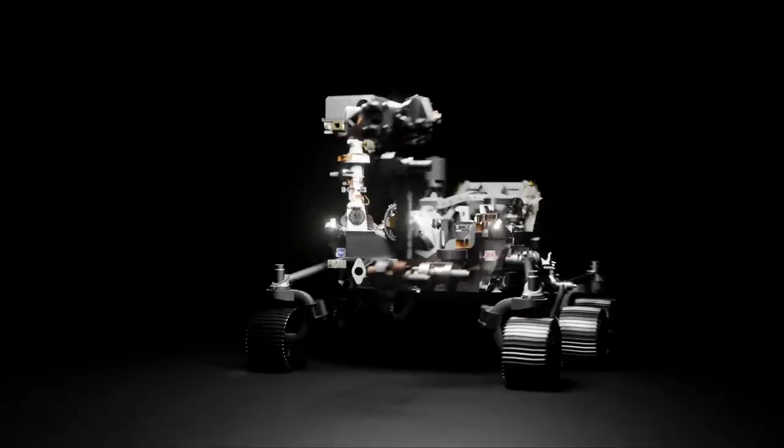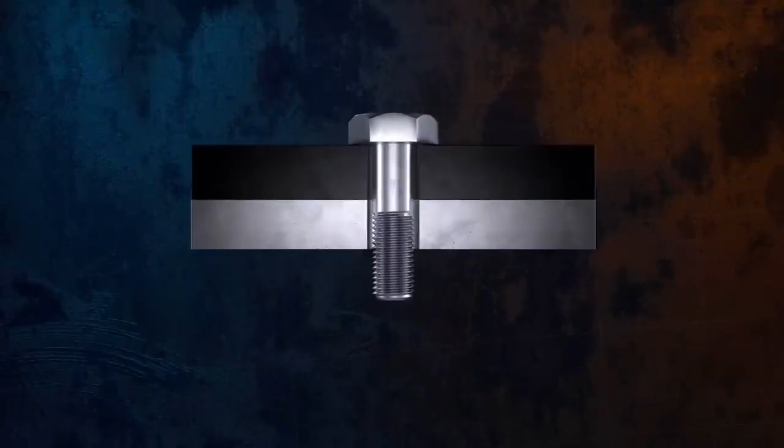But there's more to them than you might think, and it all starts with the assembly process. Here's a simple bolted joint, where the fastener, in this case a single bolt, passes through holes in two plates and is secured with a nut to complete the assembly.

Let's look closely at what happens when the nut is tightened. As it's turned, the threads on the bolt and the nut engage, and rotation of the nut pulls the bolt threads down, which causes the bolt to stretch. This stretching creates a tensile force in the bolt, pulling the two joined members into contact with one another and compressing them.

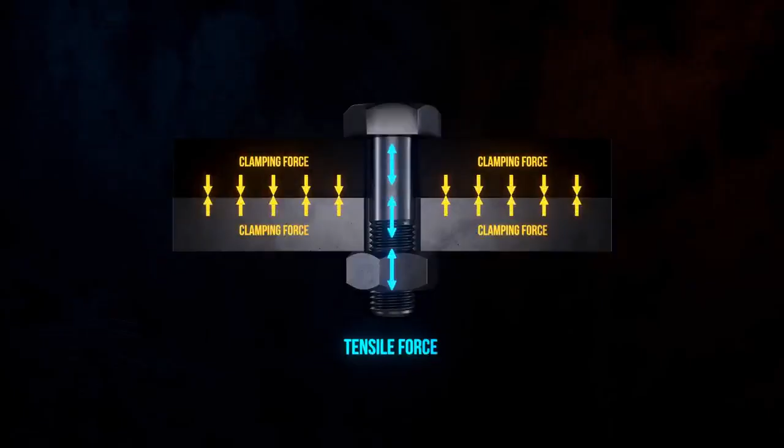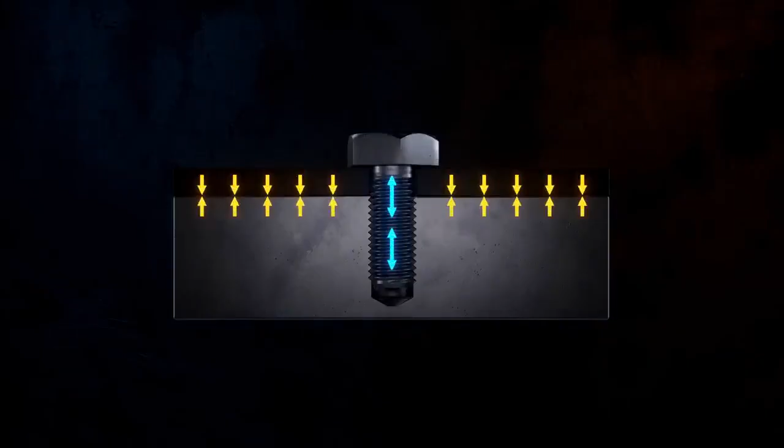The same thing happens for screws in threaded holes, except the tensile force is generated by tightening the screw instead of a nut. This tensile force in the fastener is called preload. It's intentionally applied to the bolt or screw before any external loads that act on the joint.

Preload is surprisingly powerful. It makes the joint stronger, more resistant to fatigue damage, and much less likely to fail. The exact way the preload force works to improve the load-carrying capacity of a joint depends on how the joint is loaded. Joints are usually grouped into two categories. If the load acts along the axis of the bolt, it's a tension joint. And if it acts perpendicular to the axis, it's a shear joint.

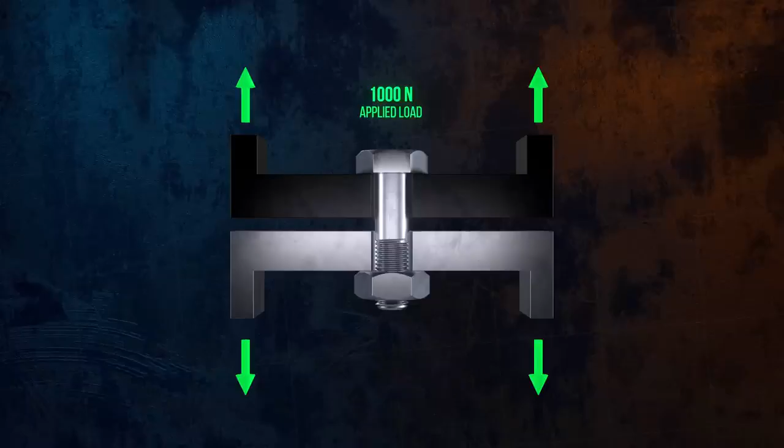Let's look at tension joints first. In these joints, the applied load is trying to pull the two joined components apart. Without any preload in the bolt, the joint begins to separate almost immediately as the load is applied, because the load stretches the bolt. But things happen a bit differently if the bolt is preloaded, because of the clamping force holding the two joined members together.

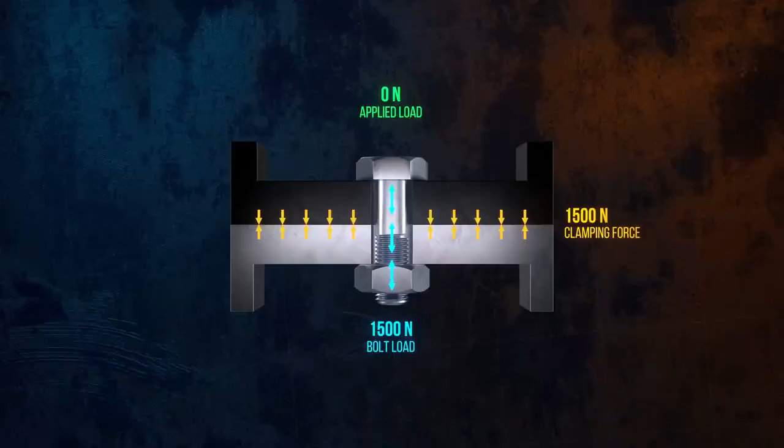As the load is applied, only a small portion of it is taken by the bolt. Most of it is taken by a reduction in the clamping force between the two joined members. The exact way the applied load is distributed between the bolt and the clamped components depends on the relative stiffnesses of the parts. The joined members are usually much stiffer than the bolt, which is why so much more of the applied load is used up by reducing the clamping force.

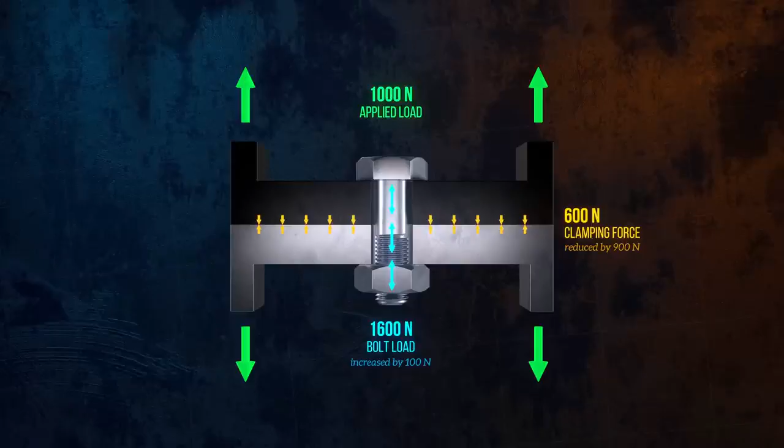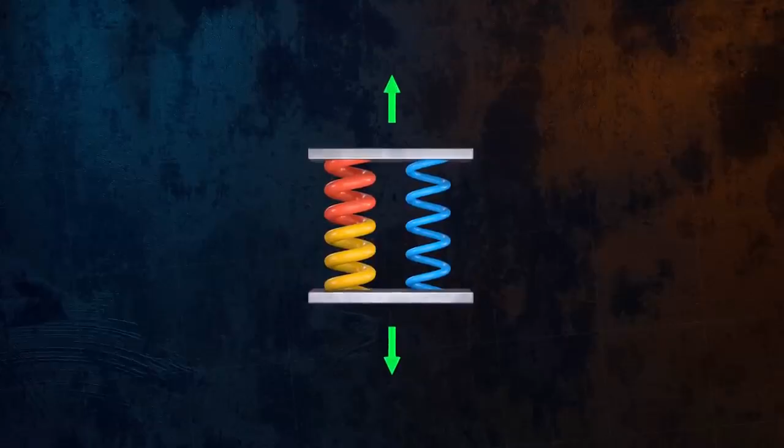You can think of the joint as an assembly of springs. When the preload is applied, the spring representing the bolt is stretched and held in place, and the springs representing the joined members are slightly compressed. When an external load is applied, the springs representing the joined members take most of the load, because they're much stiffer than the bolt spring.

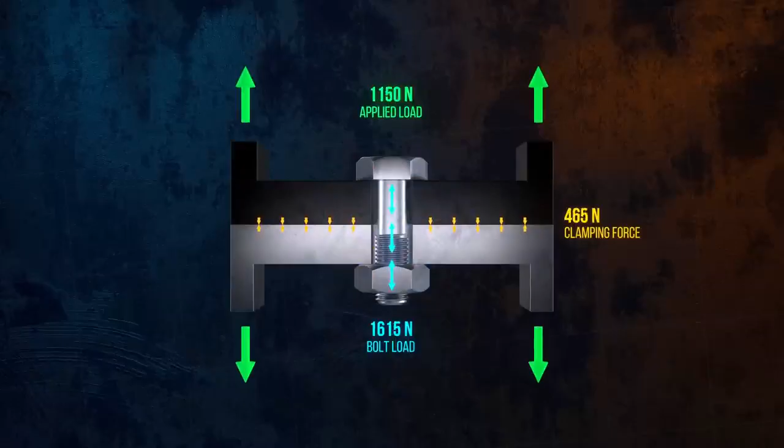If the applied load increases enough that the clamping force is overcome, the two members move apart from each other. At this point, any additional load that's applied to the joint will be taken only by the bolt, right up until failure.

Here, the joint has failed by fracture of the bolt, but tension joints can also fail by failure of the joined members, or by stripping of the bolt or nut threads. For design purposes though, failure of a tension joint is usually considered to occur once the clamping force has been overcome, because it's likely to fail soon after as any additional loading is applied only to the bolt.

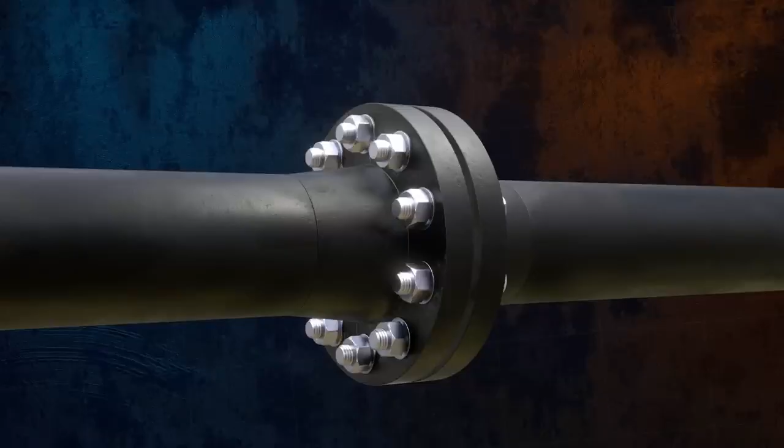In applications where the clamping force is used to maintain a seal, failure might be considered to occur once the clamping force drops to below a critical value, beyond which the seal is no longer considered to be reliable.

As well as helping to keep clamped parts in contact, preload is hugely beneficial for joints that experience cyclic loading and are at risk of fatigue failure, because fatigue life is a function of the applied stress range, not the magnitude of the applied stress. Since the bolt in a preloaded joint only carries a small proportion of the overall load, it will have a much longer fatigue life than a bolt without preload.

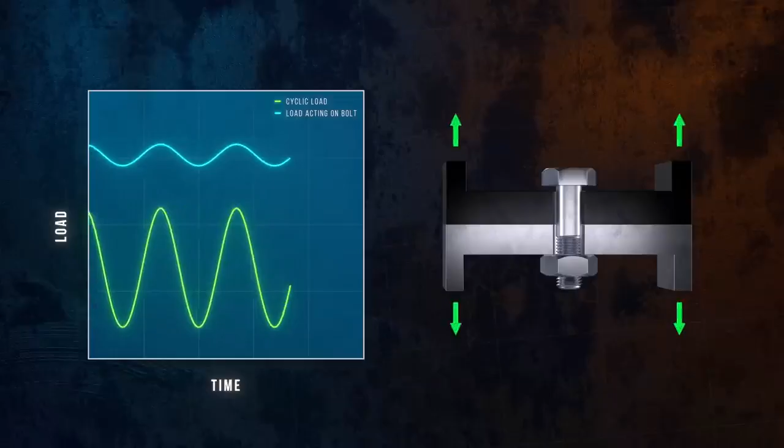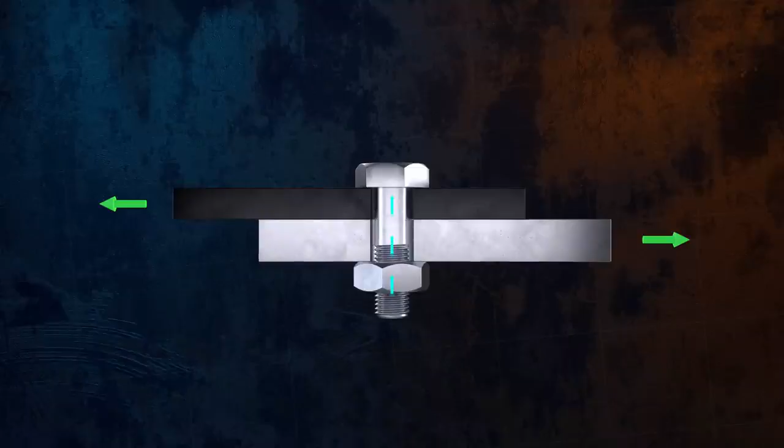Let's look at shear joints next, which are very common in structural steel assemblies. In shear joints, the load acts perpendicular to the bolt axis. In this scenario, applying preload to the bolt is useful because the resulting clamping force generates a frictional force that resists any sliding between the two joined members.

The magnitude of the total frictional force can be calculated in exactly the same way you would calculate the frictional force acting on a block sliding on a surface. It's equal to the force normal to the surface, multiplied by a coefficient of friction.

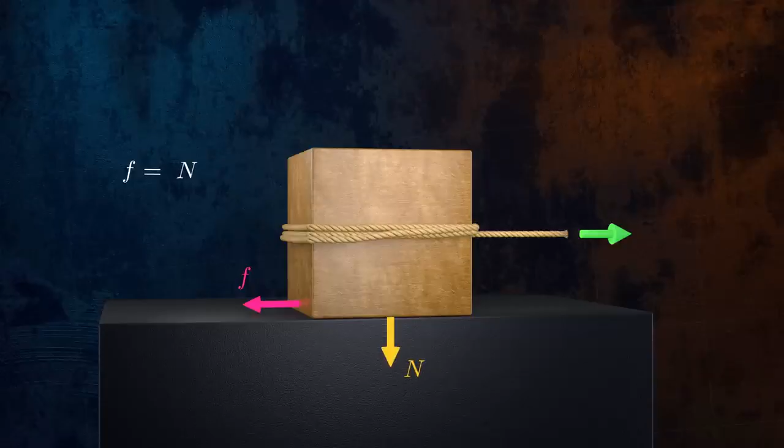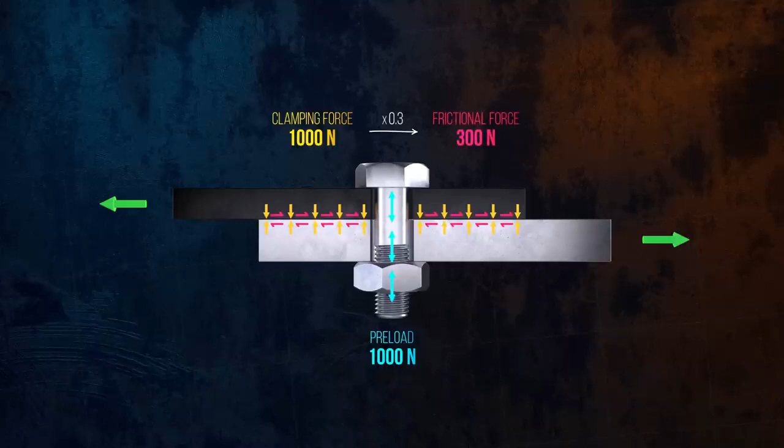In the case of a shear joint, the force normal to the surface is the clamping force, which is equal to the preload. The coefficient of friction depends on the specific materials being clamped, but in this case we'll assume a value of 0.3.

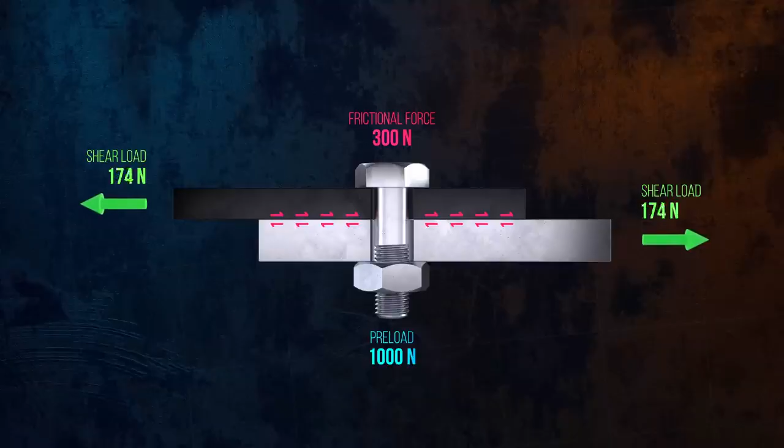The frictional force is useful because so long as it's larger than the applied shear force, the bolt doesn't actually see any shear loads. The full shear load is resisted by the frictional force, and the bolt is only loaded by the tensile preload force. Joints designed to use this frictional force to carry shear loads are called slip-resistant joints.

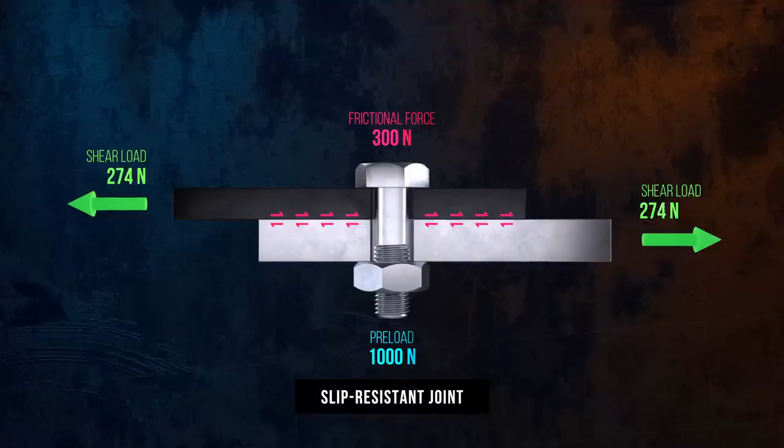If the applied load exceeds the frictional force, the joint will slip, and the joined parts will come into direct contact with the bolt, which is called bearing contact. In some applications, the joint is considered to have failed if it slips, but in others, slipping is acceptable.

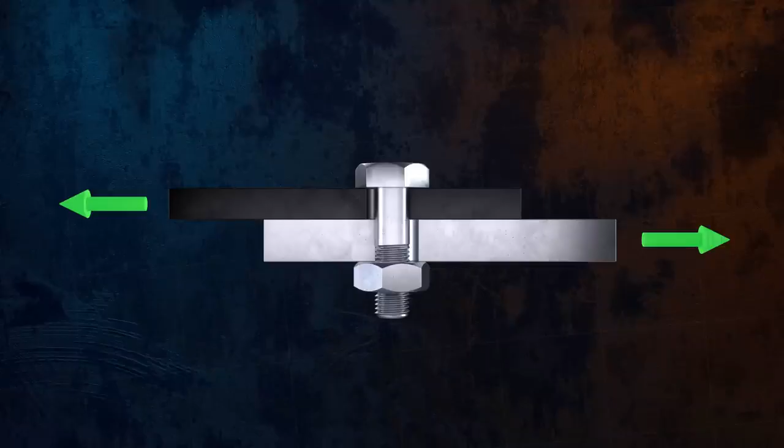A shear joint, where the load is transmitted directly from the joined members to the bolt by bearing contact, either because the applied force has exceeded the frictional force, or because the joint has intentionally been designed with little or no preload, is called a bearing joint.

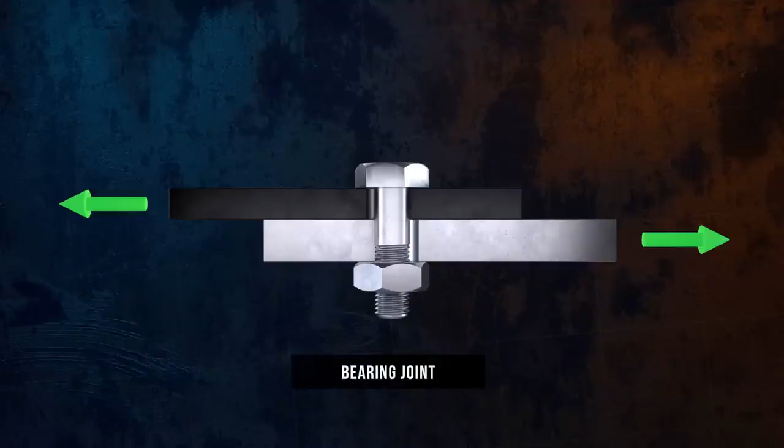Bearing joints can fail in a few different ways. They can fail by tensile failure of the clamped material. They can also fail by bearing failure, where the bearing stress at the contact surface causes an elongation of the bolt hole.

Or if the hole is located close to an edge, the joint can fail by tear out, where the material around the hole in the clamped part shears. To reduce the risk of tear out, bolts should be located at least 2 diameters away from an edge.

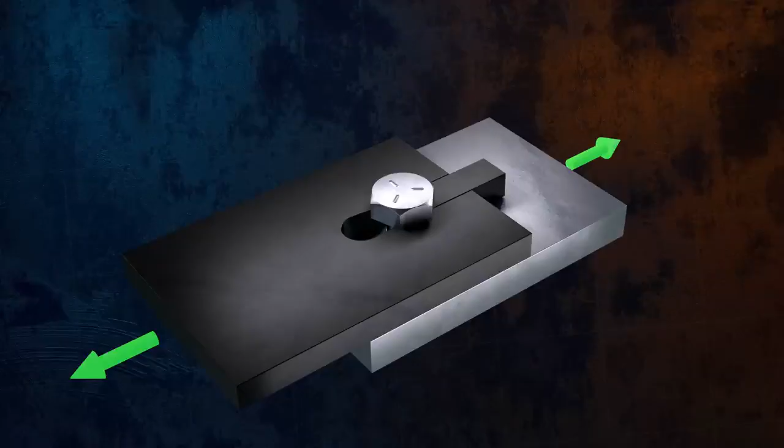And finally, bearing joints can fail due to shear failure of the bolt itself, when the shear stress in the bolt exceeds the shear strength of the material.

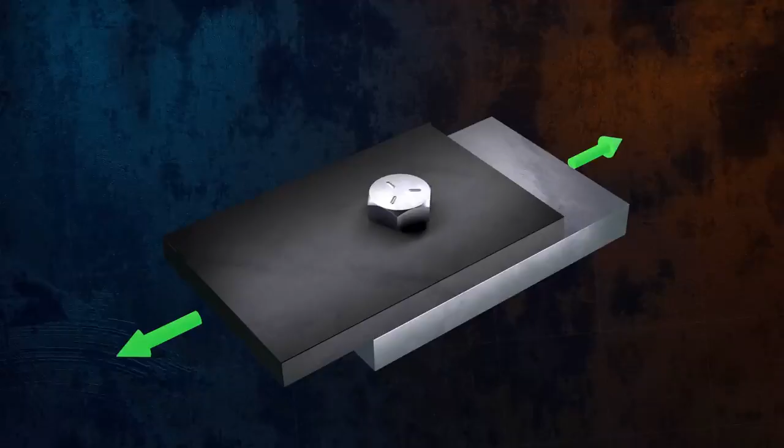For this type of joint, it's best to avoid having the threads of the fastener extend into the shear plane, because the reduced cross-sectional area within the threads will result in a larger shear stress on the bolt, meaning that the bolt will fail at lower loads.

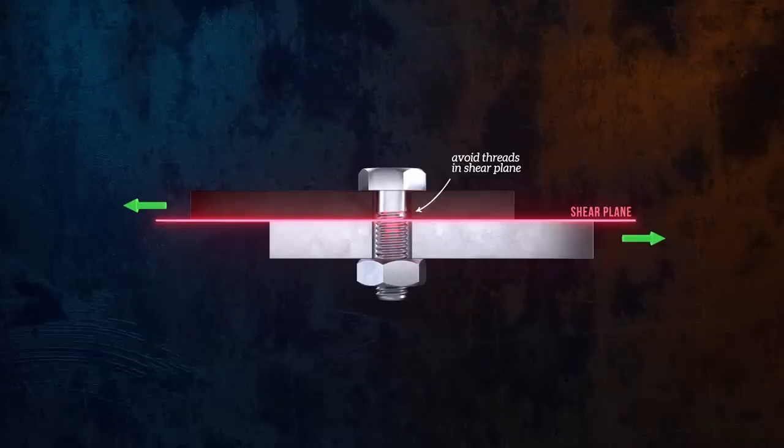Clever design can also help reduce the risk of shear failure of the bolt. The shear joint configuration shown here is called single shear. There's a single shear plane.

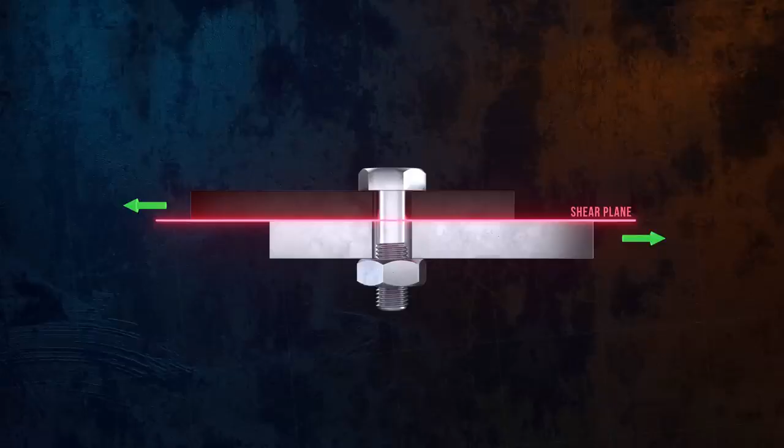But a simple change to the design can result in 2 shear planes instead of 1. 2 distinct cross-sections within the bolt are resisting the shear force, so the shear stress in the bolt is halved. This is called a double shear joint. It allows the joint to carry a much larger shear load.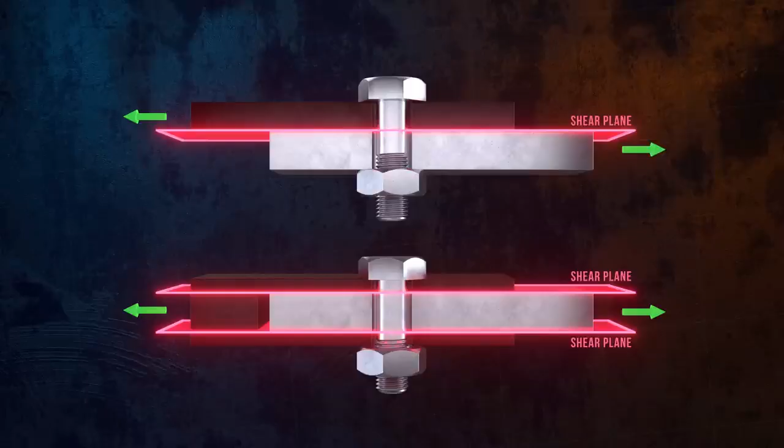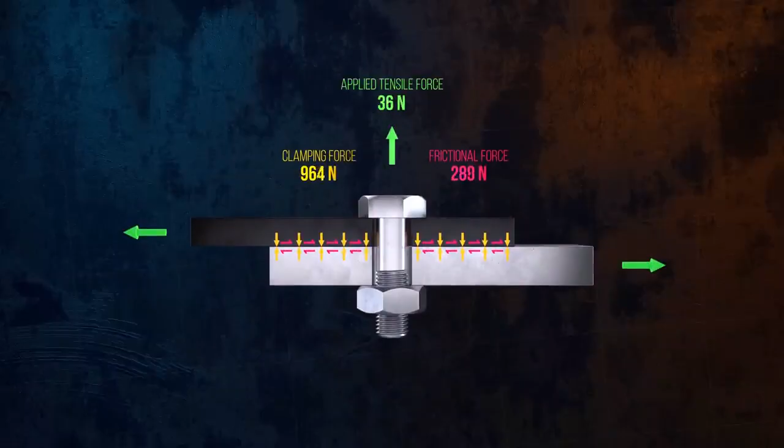Joints aren't always loaded only in tension or only in shear. In many cases, a joint will be subjected to both tensile and shear loads, in which case their combined effect needs to be assessed. If, for example, a joint is mainly loaded in shear, but also has a significant tensile load that acts to reduce the joint clamping force, the frictional force available to resist the shear load will be reduced.

Similarly, any applied tensile or shear loads that are eccentric, meaning that they aren't aligned with the bolt axis, will result in bending moments acting on the joint. This can introduce additional shear and tensile loads that need to be assessed.

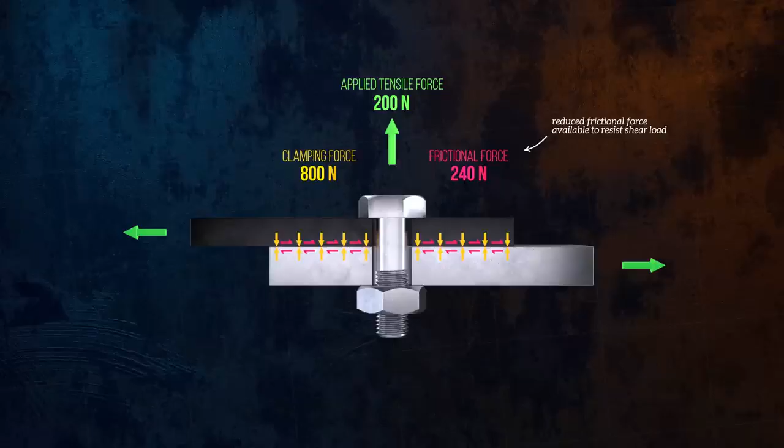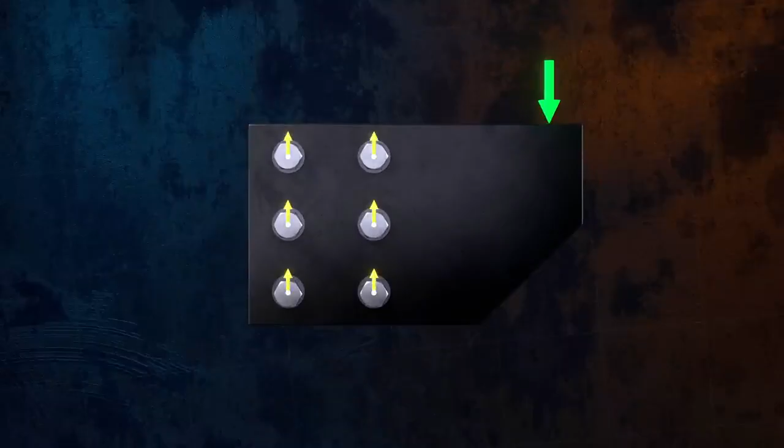Let's look at an example of an eccentric shear load acting on a pattern of 6 bolts. The applied shear load is distributed evenly between the bolts. But there's also a moment introduced by the eccentricity of the load. The moment acts about the centroid of the bolt pattern and introduces additional shear loading on the fasteners that is proportional to the distance between the fastener and the centroid.

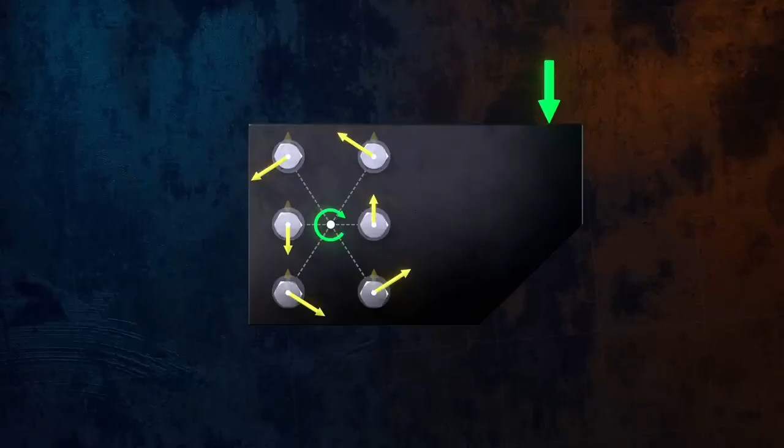There's an important question we haven't answered yet, which is how much preload should be applied to a joint. It depends on the application, but in many cases, the simple answer is that the preload should be as high as possible, although not so high that the clamping force could damage the parts being joined.

The main limiting factor is usually the strength of the bolt. A preload value that stresses the bolt to 70% of its yield strength is often used.

The preload force that generates a tensile stress equal to 70% of the yield strength can then be calculated as 70% of the yield strength multiplied by the tensile stress area of the bolt. The tensile stress area accounts for the effect that the threads have in reducing the cross-sectional area of the bolt.

Different equations are used to calculate the area for unified and metric fasteners.

A typical M12 structural steel bolt will have a 70% yield preload of around 38 kilonewtons. To increase the preload, you can either increase the size of the bolt, or you can use a material with a larger yield strength.

Preload clearly has a huge impact on how well a bolted joint performs, so we need a way of reliably controlling how much preload is applied to the bolt. The most common way of doing this is by controlling how much torque is applied to tighten the nut, bolt, or screw. This is normally done using a torque wrench.

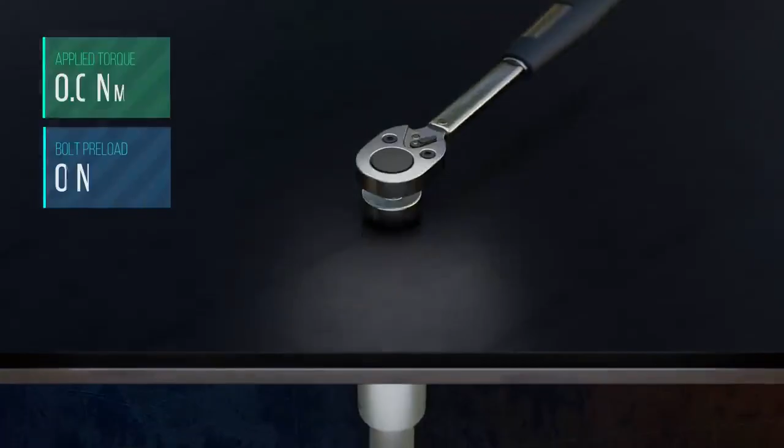This is why you see torque values on products or on engineering drawings. It's a way of applying a specific amount of preload to the bolt.

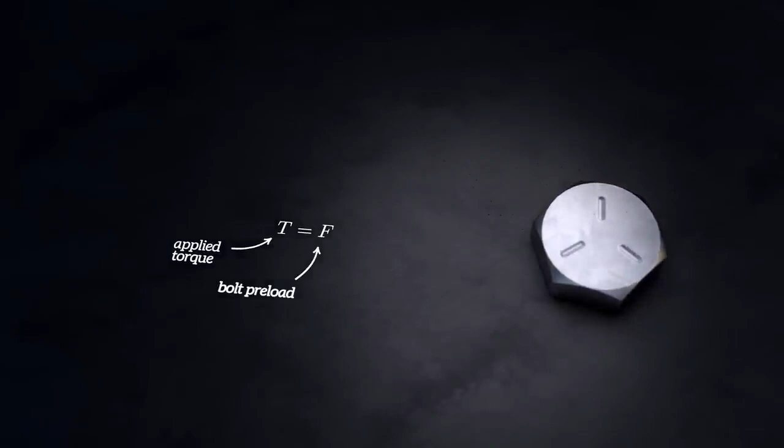The torque to be applied to obtain a preload F in the bolt can be estimated based on the nominal diameter of the bolt, D, and an empirical parameter, K, called the nut factor. The nut factor is usually around 0.2, but will vary significantly depending on the specific application.

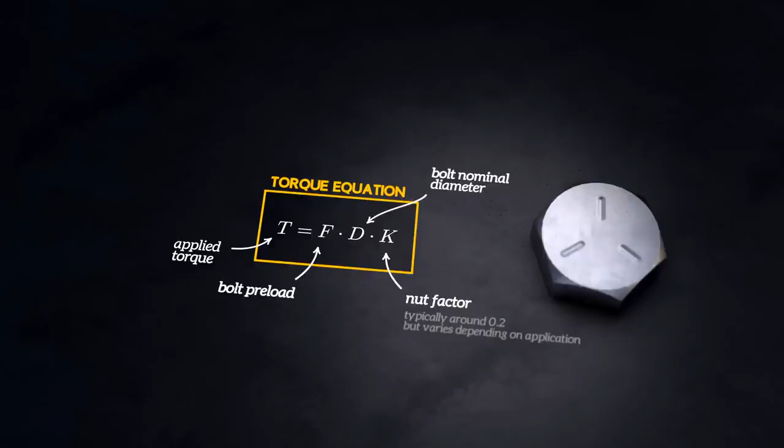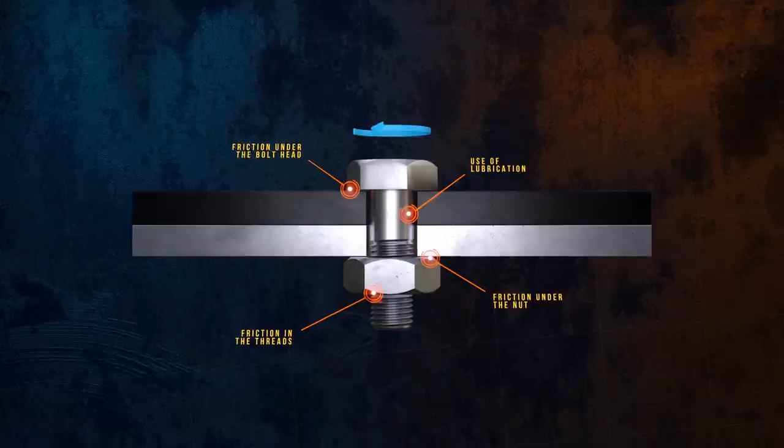This method of controlling preload is used a lot because it's easy to measure torque using a torque wrench, but the problem is that it isn't very accurate. There's a lot happening as the torque is applied. Friction in the threads, friction under the nut and the head of the bolt, and the use of lubrication all introduce a lot of uncertainty, and as a result, using the torque method, you're likely to get a preload in the bolt that's only within 25% of the targeted value. This is good enough for a lot of applications, but in some cases, more accuracy is needed.

Another method for controlling preload is to tighten the nut enough to bring the two mating surfaces together, and then turn it through a defined angle. The angle needed to achieve the desired preload can be calculated based on the thread pitch, the bolt length, and the material Young's modulus, or it can be determined experimentally. This is called the turn of nut method. It's easy to use, doesn't require any specialist equipment, and the rotation of the nut can be inspected, but it still only has an accuracy of around 15%.

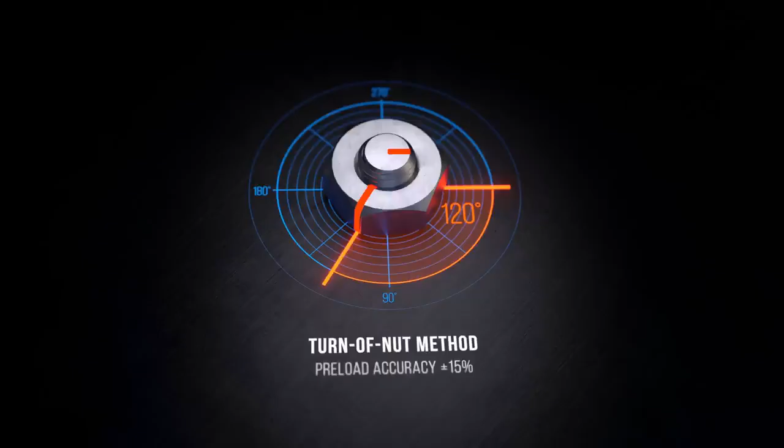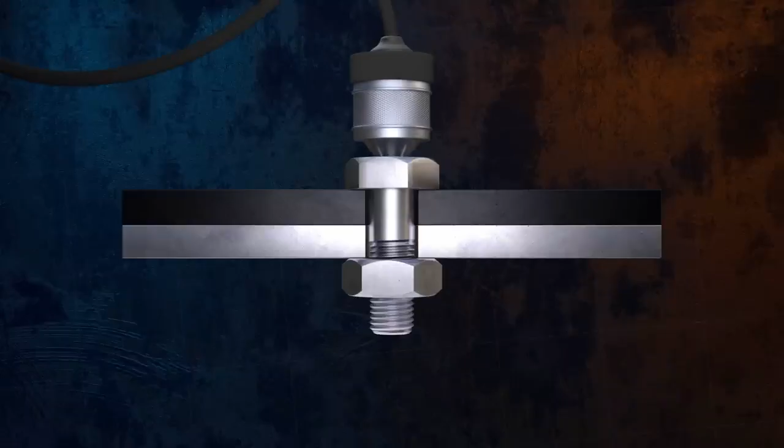The most accurate method for controlling preload is to measure the elongation of the bolt when the torque is applied, because from there you can easily calculate the force in the bolt. In theory, the elongation can be measured using calipers before and after torquing if both ends of the bolt are accessible. But more commonly, ultrasonic measurement techniques are used to determine the elongation. Directly measuring bolt elongation allows accurate preloads to be generated to within a few percent of a target value.

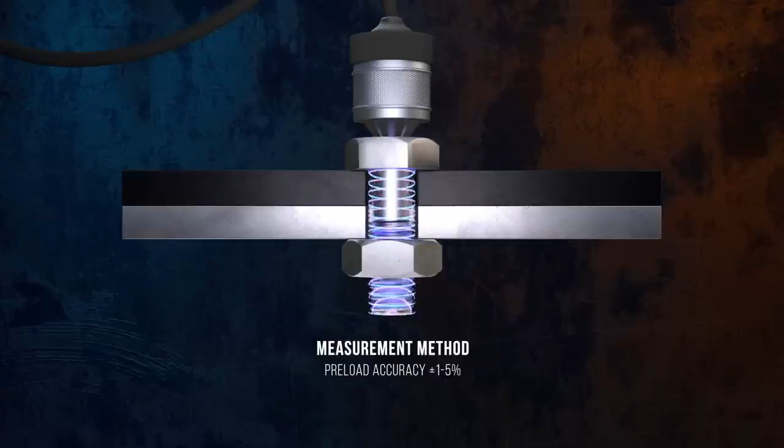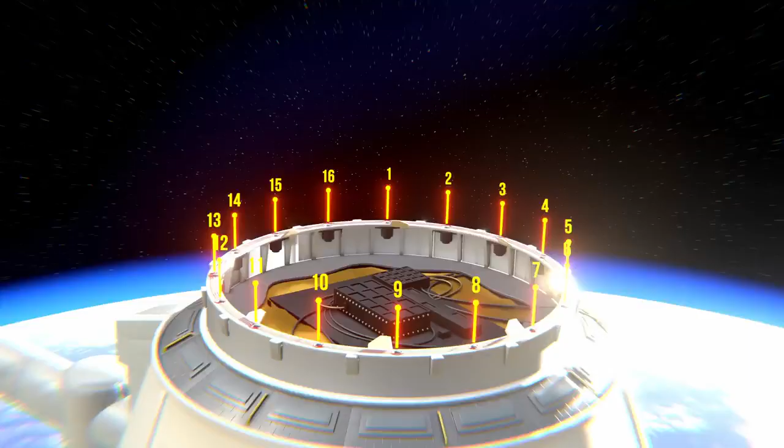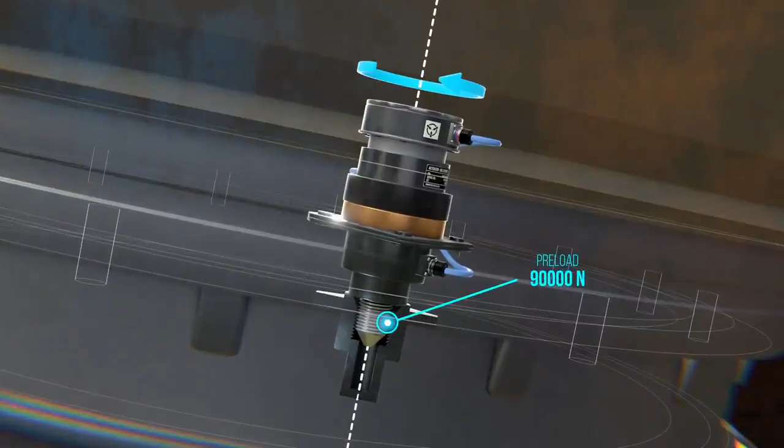One of the berthing systems used on the International Space Station, the Common Berthing Mechanism, uses 16 bolts to connect and create a seal between modules on the ISS. Upon docking, each of the 16 bolts mates with a nut, and a torque motor is used to apply a preload force of 90 kilonewtons. To accurately control the preload levels, load cells with strain gauges were incorporated into the joint design to measure the elongation of the bolts, because just measuring the applied torque wouldn't have been accurate enough.

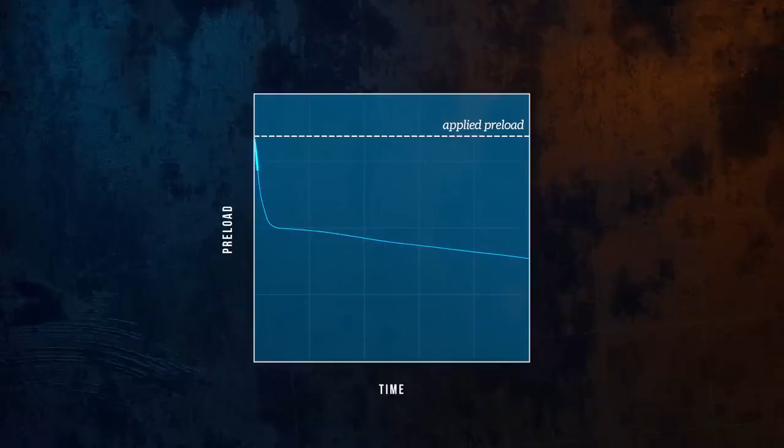A complication when it comes to accurately controlling preload is the fact that the preload in any bolt reduces over time, for several different reasons. One of the main causes of preload loss is embedment, which occurs in the minutes or hours after the fastener is first torqued. When the various surfaces of the joint come into contact, local yielding occurs as the microscopic peaks in the contacting surfaces are flattened. This reduces the gap between the bolt head and the nut, which can result in a loss of preload.

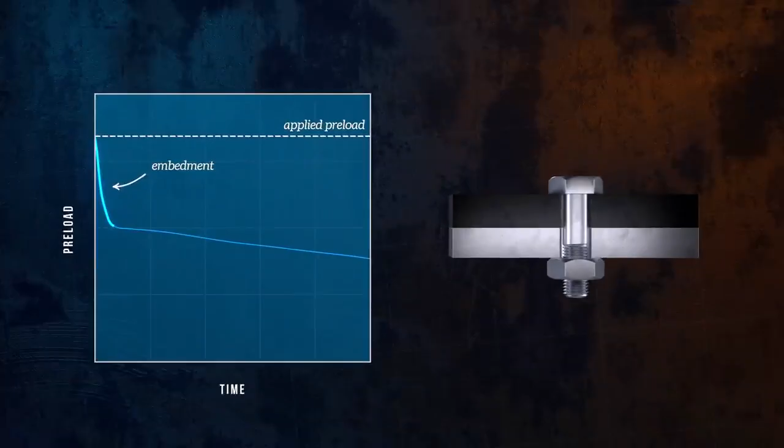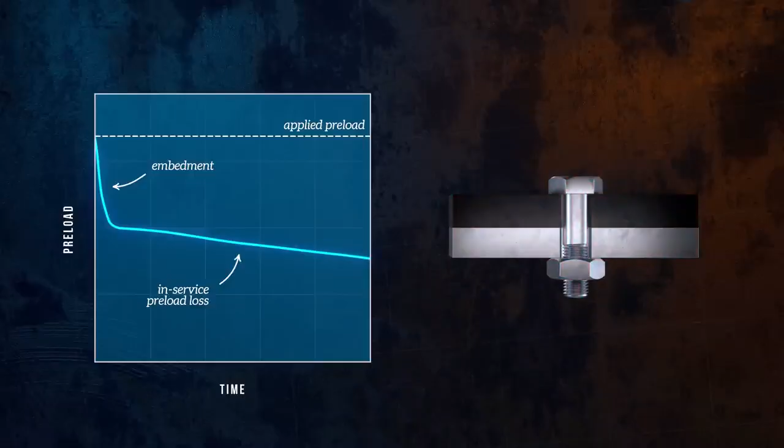Additional preload loss can also occur over the life of the joint, with factors like in-service vibration loads causing loosening of the joint, or elevated temperatures resulting in creep. To minimize loss of preload, it's a good idea to use locking mechanisms like adhesives or special washers to help prevent loosening of the joint, and to re-torque joints after initial tightening and embedment has occurred.

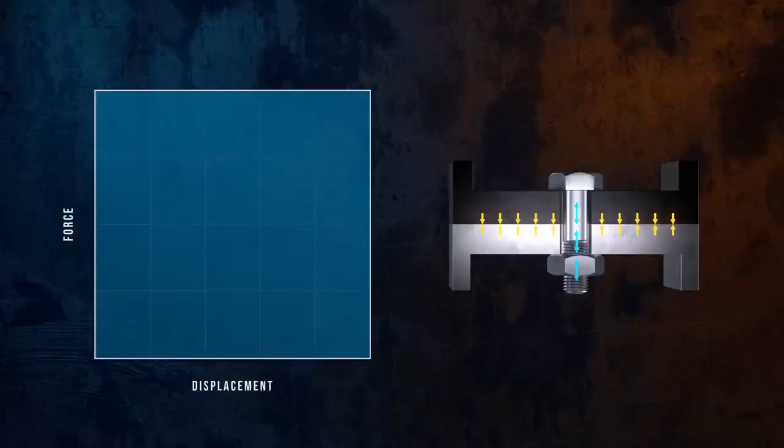If you want to develop a deeper understanding of bolted joints, one important thing to grasp is exactly how an applied load will be distributed between the bolt and the joined members. A really useful tool for understanding this is the joint diagram. It allows you to visualize the forces and deformations at the joint and can help you develop a more intuitive understanding of how bolted joints behave.